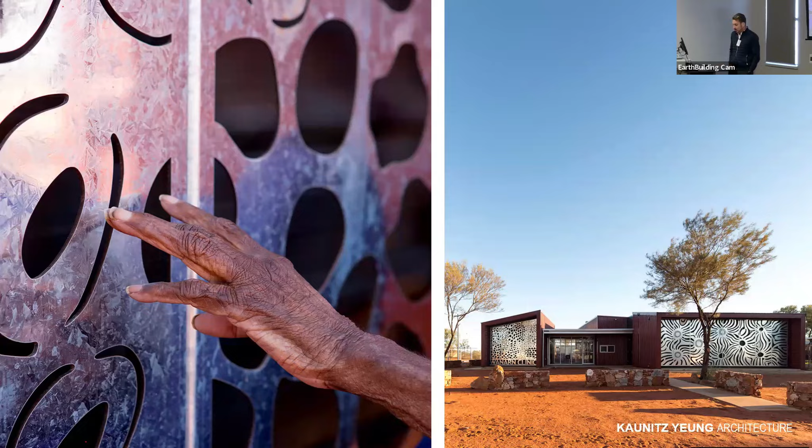When I left the Solomons and moved back to Australia to formally set up the practice with my wife, Go Yeung, the first major project was here in the desert in Wanarn, in the Ngaanyatjarra lands, almost 1,000 kilometres west of Alice Springs. At that time, we had a deep desire to use local materials, and we wanted to make our own blocks for this project. And we really came up against the full difficulty of supply chains and costs and the logistics of doing that.

We did succeed in doing these beautiful stone walls with the stonemason who worked with local youth to collect the stones and make the stone walls. But it took time for us to be able to get to the stage where we could move to the next level with local materials.

And then, you know, you fast forward a decade from Wanarn, which is that project I just showed you, to this, where we finally got to the point where we were able to convince clients to use rammed earth and use local materials. And in a way, the whole philosophy of designing with country and the budgets for these projects, and the sophistication of these projects got to a level to allow that to happen, really.

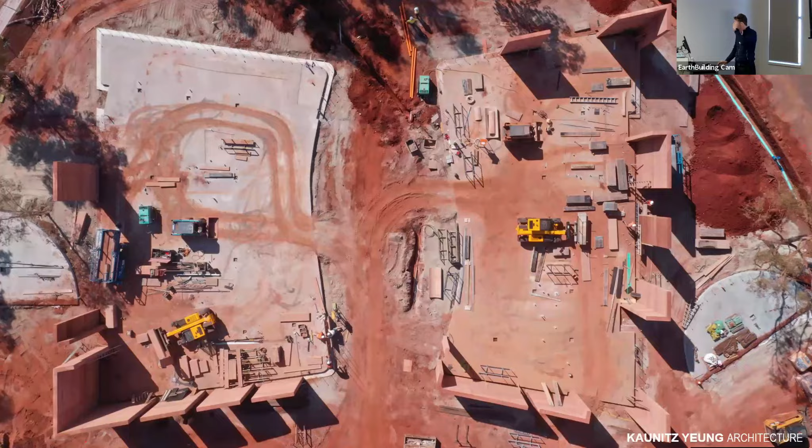And I think what we learned from the stone walls all the way back in Wanarn, which was those simple stone walls really made the community feel like country was part of their project, was part of the building, and therefore the building was connected to country. We saw that at a whole other level on this project, and that's subsequently what we've seen on other projects. I'll just skip through these. There's the site works. This courtyard, these trees have now grown, and the opening here is now almost full of tree canopy.

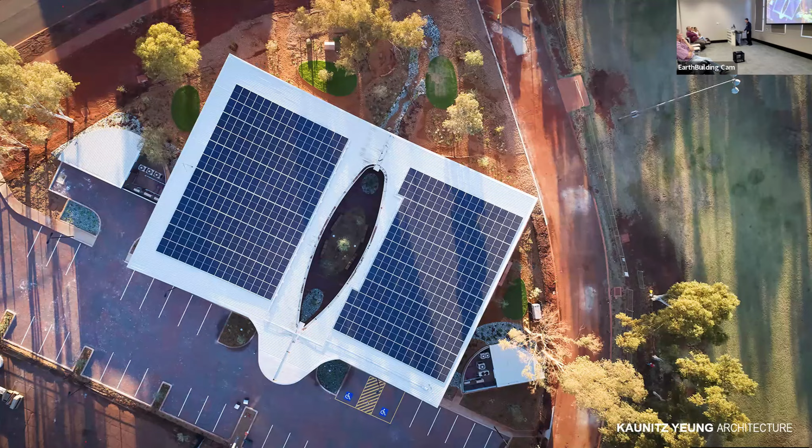A lot of solar on this building. The sustainability on this building is a good step forward. There are practicalities with delivering these buildings and restrictions, but the building, essentially, if they turn the air conditioning off at night, would run 90% on the rooftop solar. So it's a very sunny place. It only rains twice a year, so there are some advantages. And then there's a whole other talk here on the great connection with local artists and community members, and the whole process of connecting the community through art here.

So I'm just going to play you a short video. This is part of the post-occupancy evaluation of the project. We organised this video to be made. We didn't go there. We left this in the hands of the community to tell the story of what the building meant to them. And I think it's important to understand, you're all much greater experts in rammed earth, I'm sure, than me. But what we're interested in with local materials, with the rammed earth, is the real connection, the humanity of the material, and the way it can elevate buildings and make them really culturally appropriate in this case, and loved and cherished, and then hopefully looked after.

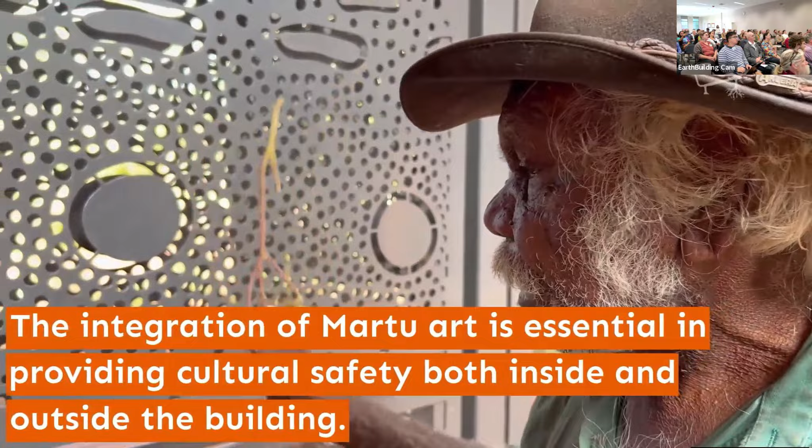All right, on that positive note, I might end the video. There is more to that, which we'll show you another time. But just to move on to another project, this is the Baaka Cultural Centre. The photos are a bit sketchy still here because it just finished last week and it hasn't properly opened or been photographed until May.

This is in Wilcannia, 1,000 kilometres west of here. It's a cultural centre for the Barkindji people on the Baaka River, on the Darling River in Wilcannia. It rehabilitates a heritage building destroyed by fire that's much loved by the community and uses rammed earth to connect with the existing beautiful stone buildings of Wilcannia, grade 1 listed in some cases.

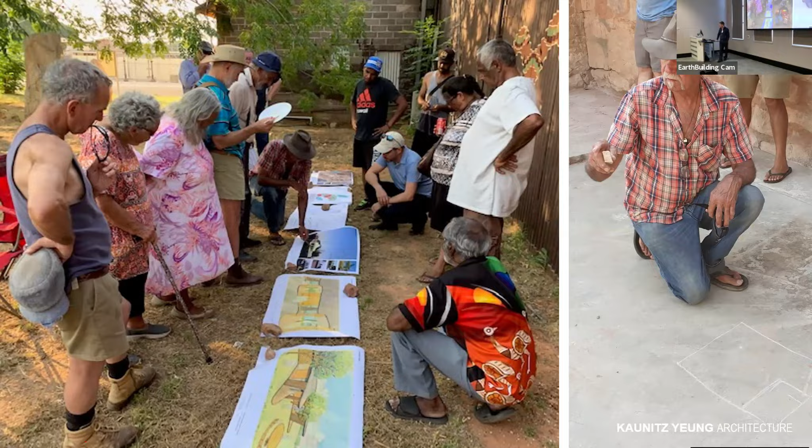Alex obviously did the rammed earth and did a superb job here, making these moulds and fulfilling the architect's every whim, no matter how hard it was. And so I'll just take you through this again. This actually was next level consultation in many ways, and I think the design of the building really shows that the design was really handed over to the community.

I don't think it's really something we would normally design, and that's Uncle Badger Bates there on the left, sketching out from the first meeting exactly what he thought for the site. But many years actually of engagement with the community.

And really at the core of the building, it was about using rammed earth to connect with the local vernacular, local stone buildings, to continue the beautiful character of Wilcannia, but to do that in a contemporary way and in a way that was fitting of a cultural centre, which is quite important to local people. This is the context of Wilcannia.

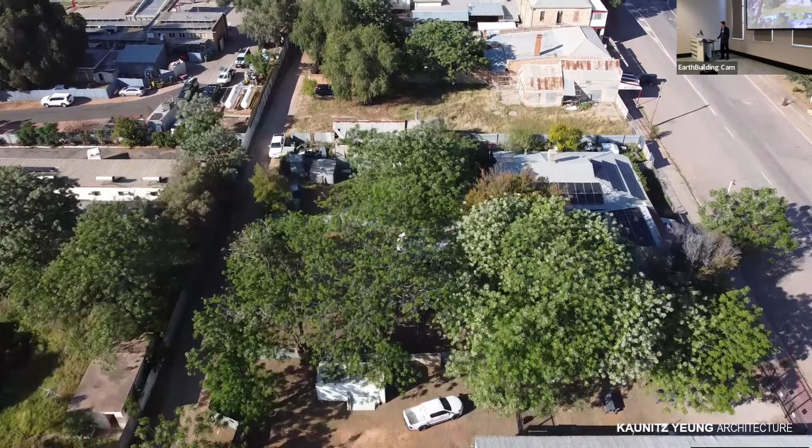The building is arranged in quite an interesting organic form. You have the old heritage building down in the black lines on the two street frontages, and then this undulating form at the back of the building, which was designed to create spaces that replicate the spatial feeling of being on the river.

Each bend in the river was inhabited by a different family, had a different place name, all the way through, the one into the other, and so we're looking to recreate that spatial quality and to create a diversity of spaces for different age groups and different uses.

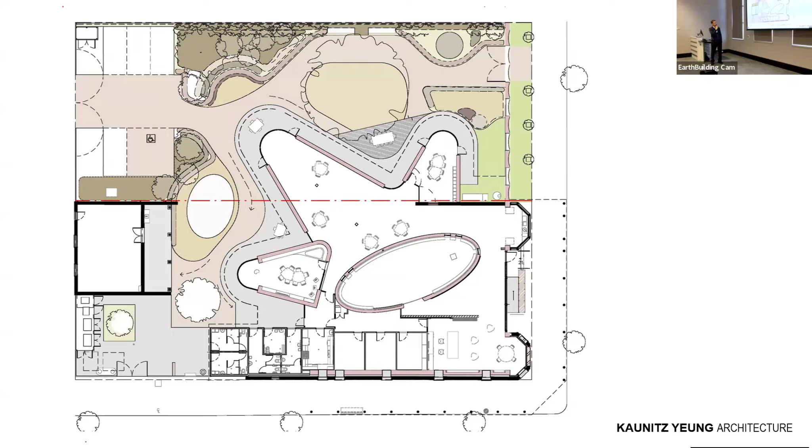And then at the centre, there's this elliptical keeping space, which originally was meant to be two-storey and go down into the ground to naturally cool the building, but because of the COVID inflation, it got cut, but the ellipse is still there, and there it is, right on cue. So this will be the sacred keeping place of the cultural centre and will allow artefacts to be returned from mainstream museums in the capital cities.

There's Marnie with her very proud moment of the most maths she's ever done in her life, designing this doorway. Her parabolic... I had to first teach her what a parabola was, but she... What sort of floor is that? That's a concrete slab floor, yeah.

So this, Aysh will talk a bit more about this, but this is single skin rammed earth. So we're grateful for her to get this across the line because it really made all the difference with this project to really maximise the value of the rammed earth. And it was a very tight budget. It's a $5.5 million project, including all the remediation to the heritage building. So, for what is a relatively complex building, having a single skin of rammed earth actually really helped maximise the architecture and connection to country and was cost effective because we were using it on both sides effectively.

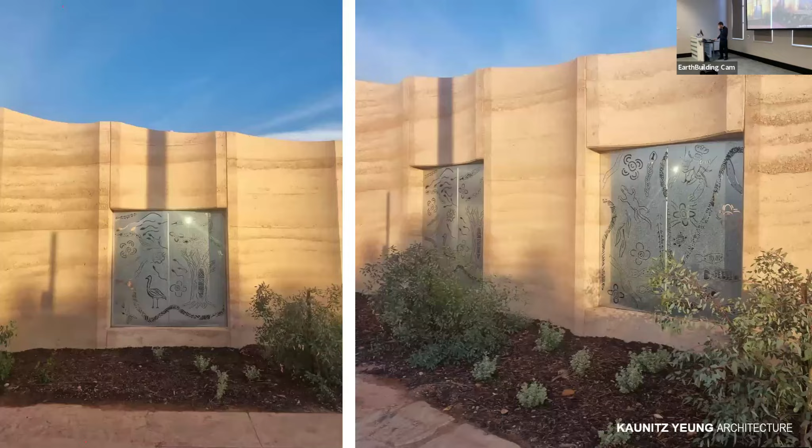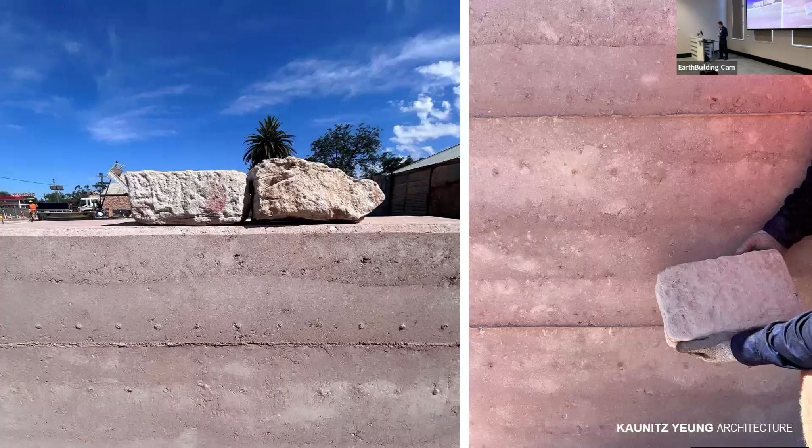A lot of work was done by Alex to do some testing of the colours and to really try to match the existing stone building. So there's the existing stone of the old building in different lights, and just making sure the mix was right for that. And here are the different sample mixes. So it was a conscious decision of doing that. In fact, I believe the mix came from the same location where the mortar for the old colonial buildings was taken from. So it was a really good colour match there with the mortar of the old building.

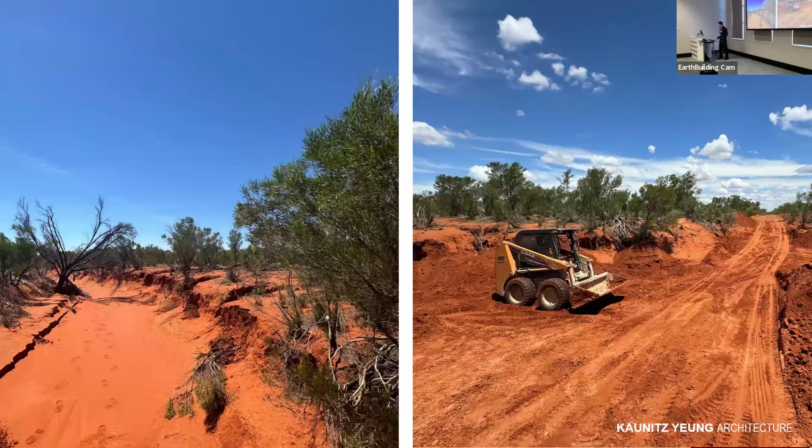All right, how am I doing for time? Good? 10 minutes? Yeah. Okay, good.

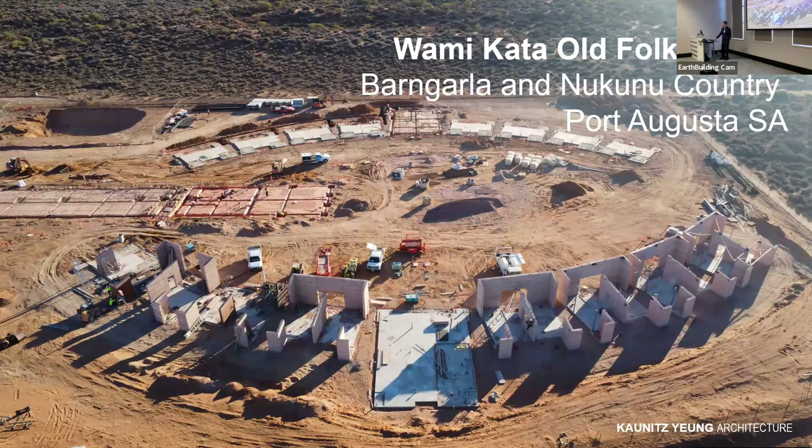So I'm just going to skip through some current projects. This is a project in Wami Kata in Port Augusta. It is a 32 plus palliative care, so 34 bed First Nations residential aged care facility, including high care, built in the valley of two sand dunes. It's quite a large rammed earth building, almost 2,400 elevational square meters of rammed earth. All the rammed earth is structural, and you'll see that in the coming slides. And Alex and Richard are out there as we speak, building.

There's a sense of the scale of this project. I think when everyone arrived on site, everyone took a breath at the scale of what had to be done. And given the location, not too remote near Port Augusta, the site definitely has its challenges, although no trees to worry about.

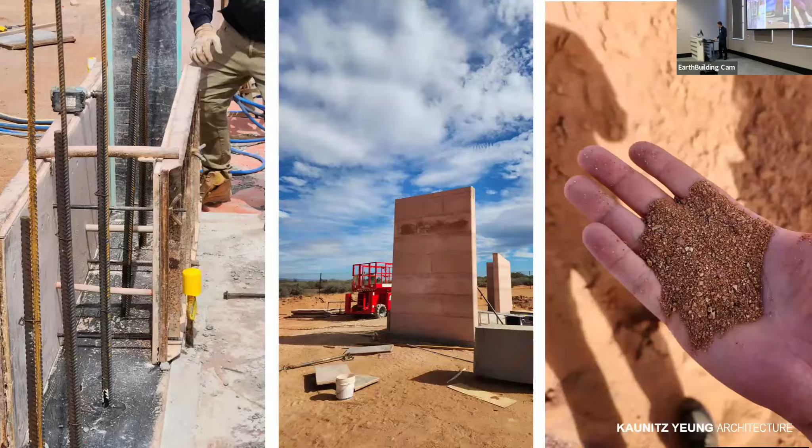And then here's some of the work that's been going on. You'll no doubt understand this much better than me, but everything's slab on ground. The starter bars coming out of the slabs, and then the rammed earth being built with reo inside, and the steel work connecting to the top of the rammed earth. Some of the material. Richard assures me this is the best quality dirt he's seen. Lots of shards, he said. So I take his word for it.

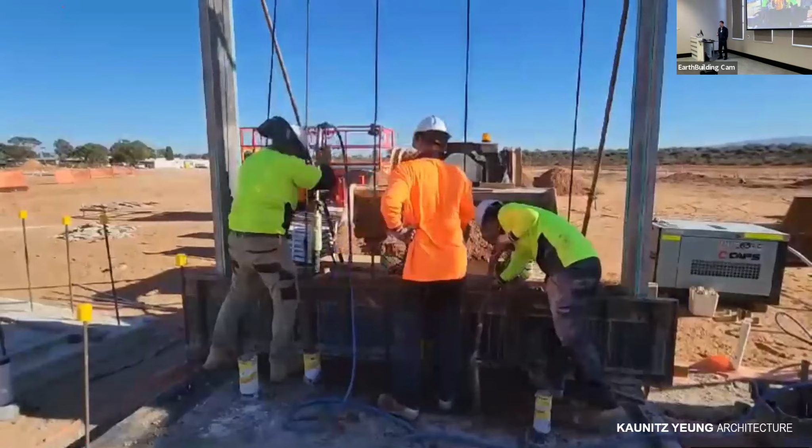So I heard some of you did some rammed earth yesterday, but we always have young architects who have not experienced these kind of things. So we have 2 great young architects working on this project, and they spent a week out on site, working out of the site shed, and got their chance. Here's Anastasia's chance. Last time I showed this video, I got in trouble for health and safety reasons. So please don't share too widely. This is Anastasia with her chance.

So it's important to give everyone in our office an appreciation of what it is to build. It's not an easy job, especially when we design such huge buildings out of it and expect such good quality. So it's good for them to know that.

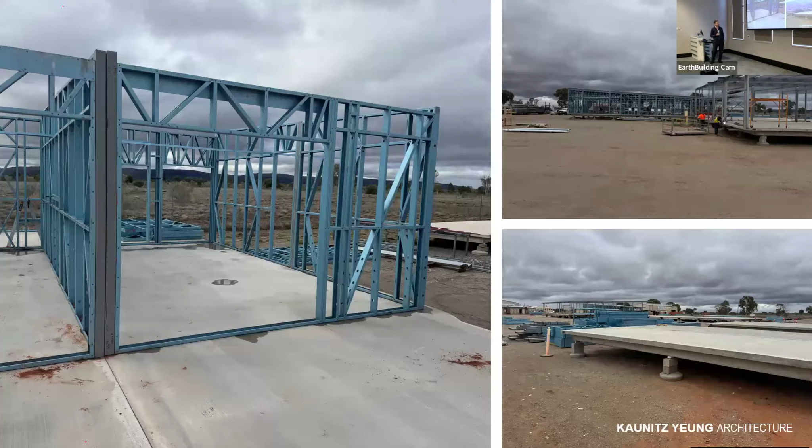Here we're also designing a version of Wami Kata, but this is seriously remote—about 750 kilometres west of Alice Springs, unlike Wami Kata. It's very remote, and construction has just started. I was actually there this week.

It started construction in the yard in Alice Springs. It's going to be 58 prefabricated modules—54 of the 58 on post-tension slabs, a system we've used a lot in our desert projects, with all steel frames.

In parallel, they've started the foundations to build the rammed earth on site. These modules will plug in and be wrapped to various degrees in rammed earth, creating a high degree of integration, trying to make this building not look like a mining camp—even though it's prefabricated—so it feels connected to country and humane, since residents will call this home.

Here you can see on the edge there's a bit of a flange that we built out. The rammed earth is going to be rammed on this slab once it gets to site, at the entry to every resident room. The rammed earth will wrap around, curve in, and form an entry feature.

So every time the resident goes into their room, they're walking towards rammed earth, and they sleep out on the veranda quite a lot, sleeping against the rammed earth. I don't know if anyone else has done rammed earth on prefabricated slabs, but if you have, I'd appreciate hearing how it went before we did it—but anyway, it's going to happen.

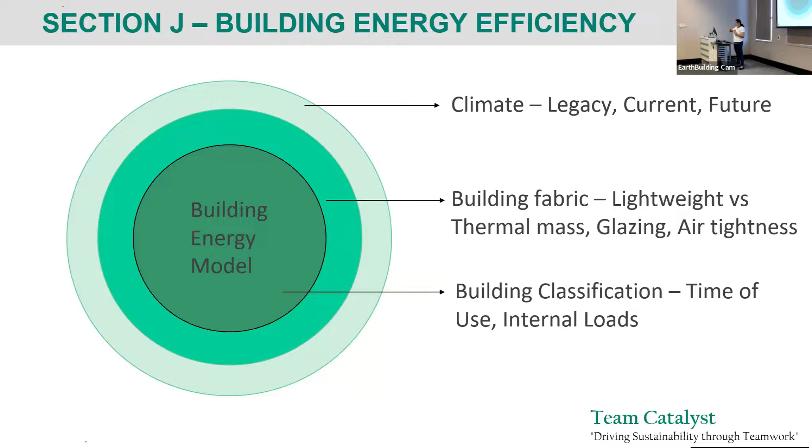But the code only has 8 climate zones. They apply this to the whole of the country, and that is quite blunt, to be very honest - it is quite blunt. So they do recognize that it is blunt, and that is why they allow us to use these verification methods to prove compliance with the requirements.

Okay, next, what is it in the code? We are talking about rammed earth walls, so the section that's relevant to us is J1, building fabric, walls and glazing. From 2019, the calculation methodology was changed - earlier we were assessing walls separately and then glazing separately, we had a separate glazing calculator.

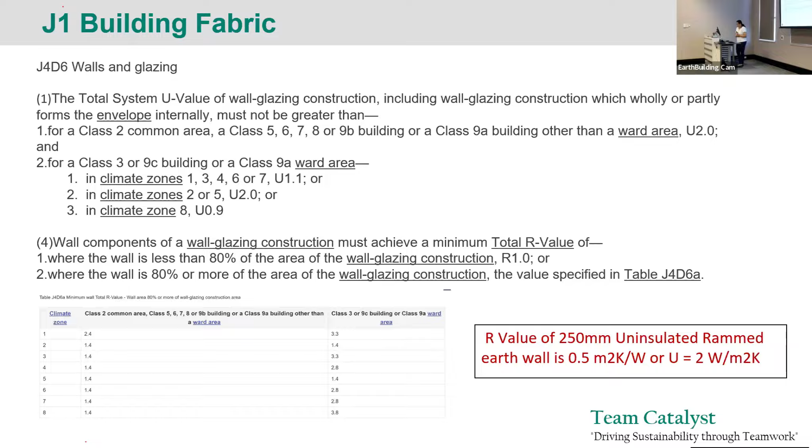And that is because aged care buildings and class 3 buildings are 24-hour operation. You're using the building during the night and during the day. So the equations completely change when you're using it during that time, there's no solar load coming in, and the building switches from heating to cooling mode during that time. So that is why you have all these increased redundancies.

So what do we do? What does the verification method do? We use building energy modeling, we use simulation, and we build a reference building model, and we build a series of proposed building models. A reference building model is nothing but, we take the architect's design, we remove all the nice shading features, because the elemental provisions in the code are derived from an unshaded building.

There are so many variations, so many designs. We can't actually calibrate the code for all these designs. So we have a series of archetypes, and all these archetypes are unshaded, okay? So to sort of mimic that, to comply with that, we remove all the extra shading from the building, and we build the reference building model exactly the way it will comply with the code using your deemed to satisfy provisions. So that is a code compliant building.

Now, when you apply all the other specifications, meaning how long should the building work, what is the internal use, the schedules, for what time is it occupied, what are your thermostat conditions, how much lighting you can have in the building, what are the internal loads, what is the people density, and all these things. You put all these things in the model, and you simulate the model for the whole year, for all the 8,760 hours in a year. You get an energy budget.

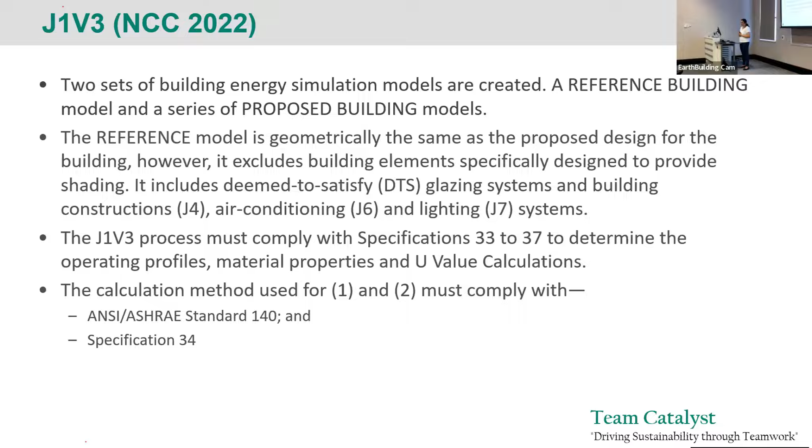Okay, and going down into the J1V3 process itself, what simulation software? So what is this simulation and how do we use it? And can any tool be used to comply? No, you have to use a tool that is ASHRAE ANSI compliant, and it has to undergo a series of testing. And what we use is EnergyPlus. It's actually developed by the US Department of Energy.

Mr. Trump doesn't know it, and we hope nobody makes him aware of it, because it's a great contribution to the world. The US government has spent, I think at this point, about 600 to 800 millions of dollars. It is free to use for everybody in the world. Every single energy simulation software which has got a front end, a graphic user interface, is actually running on the US DOE EnergyPlus. It's a brilliant piece of software. It's had some 20-25 years of R&D going into it. And that's one of America's greatest contributions to humanity. We just hope nobody tells it to Mr. Trump. So, okay.

And we use a front end, but EnergyPlus is all computer language. Okay, I can't do any coding. So we really can't access it that easily. We need a graphic user interface that helps us convert the geometry data that we put in into the simulation language, and it gives us various results.

So we use what's called DesignBuilder, and you can see that we have one single model there, and we are able to get all these outputs from that one single model. We are able to do so many analyses, and that is what helps us consult with our clients to help them navigate this very, very complex compliance process, particularly for complex buildings and high-performing buildings.

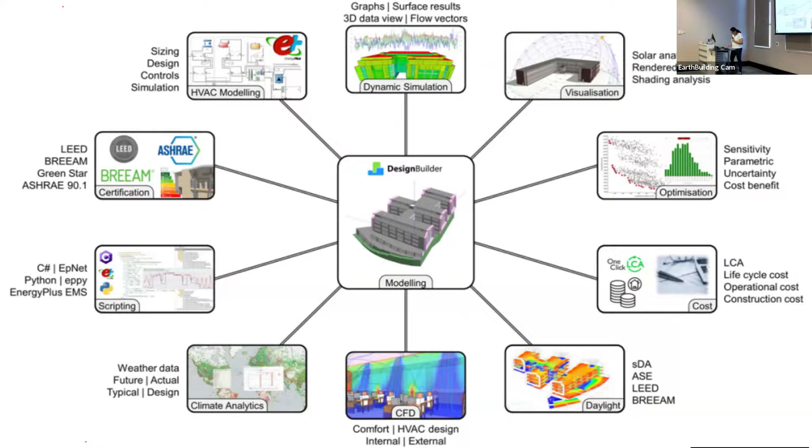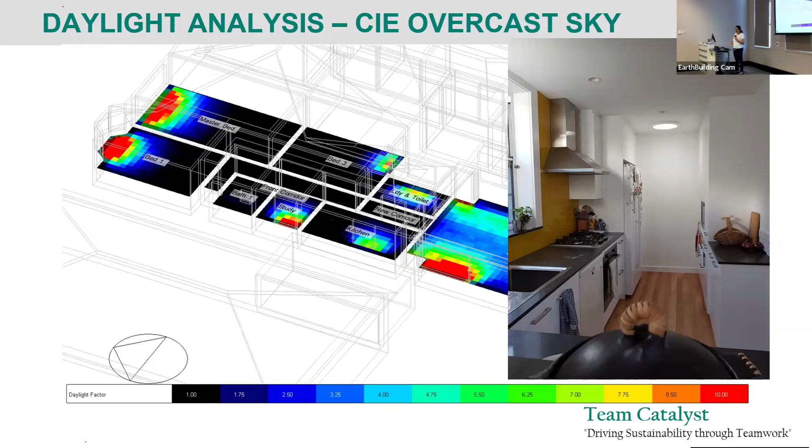So this is the kitchen area, and you can see there's a big black. One half of the kitchen is getting light, the other half of the kitchen, there is not much light. So we introduced a solar tube there. This is a very, very old semi, about, I think, 80, 90 years old. So the owners were a bit hesitant to break the roof, but then we managed to introduce the solar tube. And now you can see that the spread is much, much better in the kitchen.

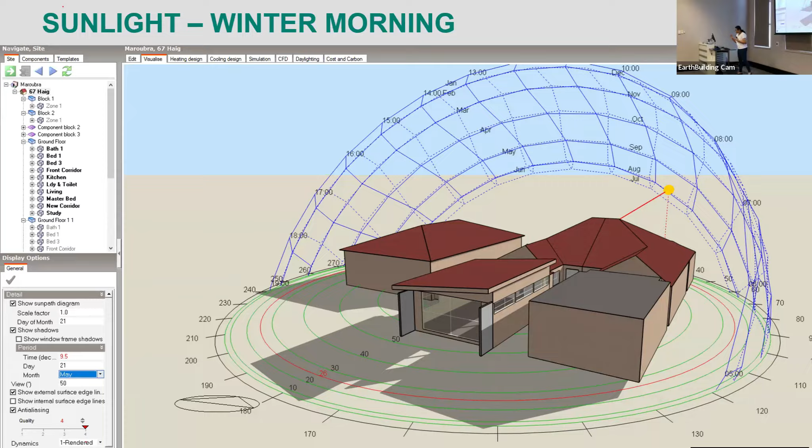Again, the model is precise to the extent that we are able to model what happens to solar geometry. You can see that's the building, and that's a winter morning sunlight. So this is the eastern facade, and you can see the sun patch in the space, winter morning. So this is what we modeled 2 years before we built. And 2 years after, that's the house which is finished, and you can see the same sun patch in the space.

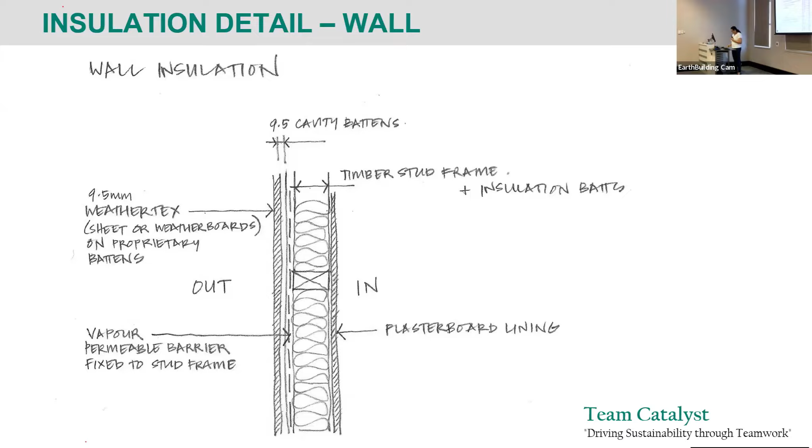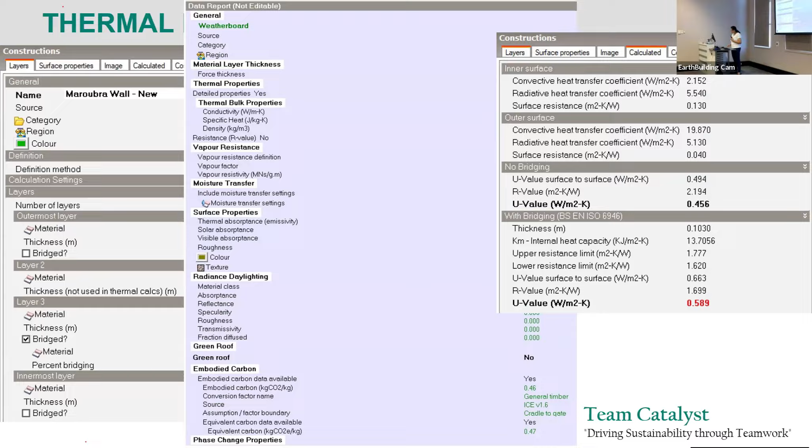And we are able to model all sorts of construction data. This is just a regular lightweight wall, and DesignBuilder is able to take in all this information. You're able to describe the wall in different layers. And it gives you a full report of all the thermal properties of the walls. And it tells you what is the U value, R value that you have to calculate. So again, lots of physics work.

But what is very interesting is the outputs that we can get from these simulation processes. So it's just not about the annual energy at this point. The code wants you to comply with the annual energy requirement. But that's just an output that we have to give for compliance. But before that, we go through a series of steps, and compliance is never about one reference building model and just one final proposed building model and it'll do the job. No. I think for each of these projects, we would have gone through at least about 10, 15 iterations.

And so the most important thing with compliance, particularly for very complex buildings, is to start working very early on in the piece to understand what is non-negotiable for the architect and what is non-negotiable for compliance. And then bring those two to the table, and everything else can be negotiated in between, because it's energy, it's a zero sum, it's a pie, right? So the size of the pie doesn't change. How you make the pie is what changes. Where can you take away some and where do you add a little bit is where the secret is.

So we do a series of analyses to understand, okay, where is this building struggling? Which rooms are the problem rooms? So you have this big precinct. You'll have probably 2 or 3 blocks which are the main culprits, which are sort of bringing the whole thing down. The rest will be fine. So you need to go down to that level, each block, each room, to see, okay, what is happening in these rooms? Our energy might comply, but the people may not be comfortable. So why are they not comfortable? You are able to see what is making that room not comfortable.

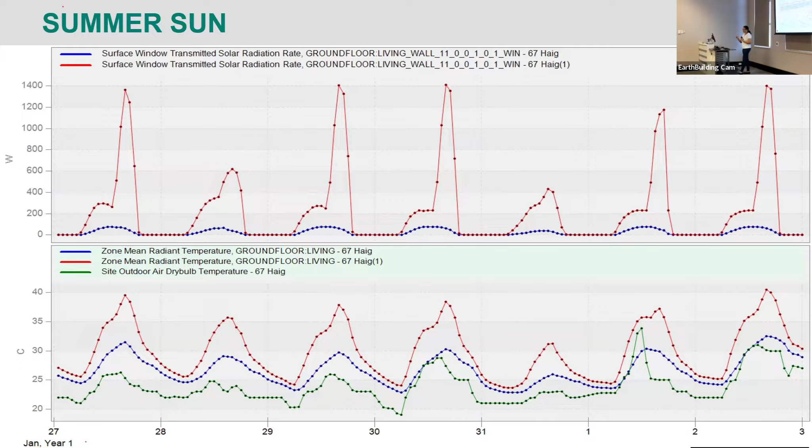So you're seeing big spikes in radiant temperature. It's about 40 degrees, midday. And then we model external blinds on the outside. Without the blinds, again, the top graph, you'll see this graph here. You're seeing these big spikes on the western window, it's radiated. The moment you put the blinds, the curves are softer.

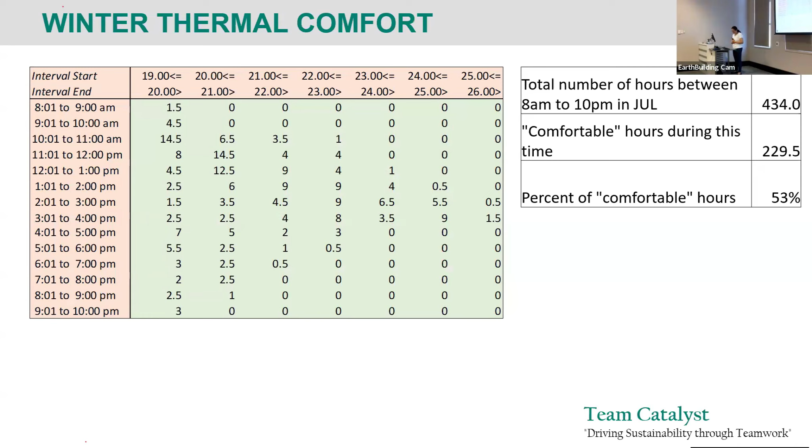So we just wanted to show students what happens. How do you actually understand simulation and reality? It's not just theory, it actually works. And then we get all the other outputs from it. We are able to calculate comfort, how many hours are comfortable during the day, comfortable during the night, and for the period, and all those things.

Okay. Thermal mass. The most important part of thermal mass, with physics: it's a beautiful material, but it has to be protected. It's very important to protect your thermal mass. It looks very nice on the outside, but to make it work, to make it useful, you need to protect and shade your thermal mass. It should be operated like a battery. It's a great storage system. Mass charges every day, and then it discharges every day. So when it is hot, it takes in the heat, it stores heat, and then it discharges the heat.

So you need to find the right balance. You have to combine a lot of other aspects, but sometimes we hit the jackpot in certain climates. So Wilcannia was one such climate, very dry. You had a good diurnal range. The mass, it was just made for it. You just place the mass.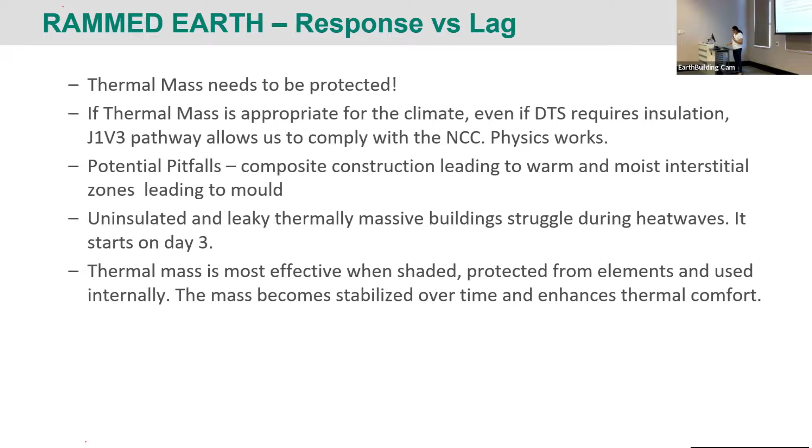So we did some simulation, we actually modeled and then we tested in a house. So an average Australian home at this point leaks to about 15 times an hour. So this is a very favorite example of mine. If we all live in a nice homogeneous balloon, and this balloon is very thin, we need to insulate the balloon because it's hot or cold outside. We want to save energy. We insulate the balloon. And then we need some windows and doors. We start making holes in the balloon.

And then we start air conditioning the balloon because we want to be comfortable. So you put insulation, but you also poked holes. And now you're air conditioning the balloon. So the holes are leaking air. You need to keep blowing the balloon to keep its shape. So at this point, an average Aussie house, you have to blow it 15 times an hour to keep its shape. Okay, so your air conditioning systems are designed for just once.

So either the air conditioning designer oversizes it massively because he knows you're going to leak 15 times. So he puts a system which is 5 or 6 times more than what you need so that you don't complain. It's nice and cool all the time. You're just air conditioning the world. Or if he right sizes it, you're going to be forever complaining. It's like, oh, this system is not working. I'm always hot or I'm always cold, because your balloon is constantly leaking.

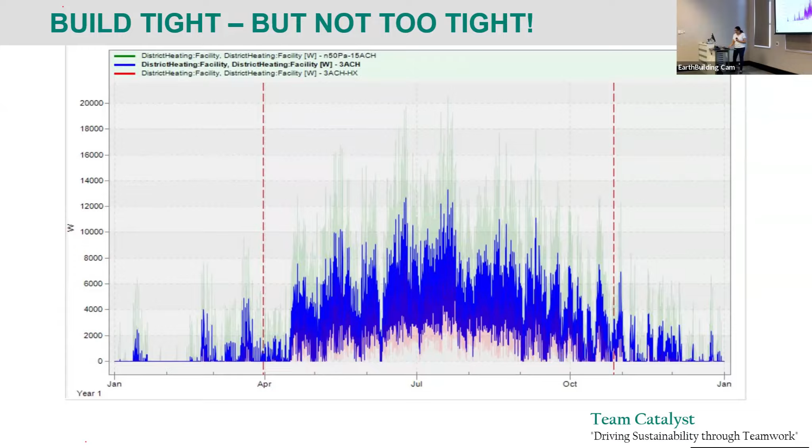And then we did the run where we introduced the magic heat exchanger, your mechanical ventilation with heat recovery. And it's come down to about 9 kilowatts. We did not increase or decrease the insulation in the walls. We did not change the glazing. We did not do anything else. This is just air tightness.

It comes down to how well you construct your buildings, how well you tape your membranes, how well you protect it from weather, and how well you detailed it to make sure there are no leaks in the joints. And you're able to bring your air conditioning system from 20 kilowatts all the way to 9 kilowatts. The biggest piece of machinery you can put in a building is the air conditioning, and it is huge. And going forward in this changing climate, no 2 years are the same.

From 2007 onwards, year on year, we've seen a change in the climate. Every single year, the weather has changed. We've seen a change in your climate file. So the buildings don't perform. We can't take it for granted that, okay, you do this, it'll be all right.

No, it doesn't happen. We are moving, the RCP 8.5 scenario looks more than likely now, and the 2050 weather is the stuff of nightmares. So we won't go there. But what it's saying is that pretty much for most of Australia, we won't have a heating season at all. And that is quite scary because I've got bananas blooming in winter in Sydney at this point, and it is pointing to that trend.

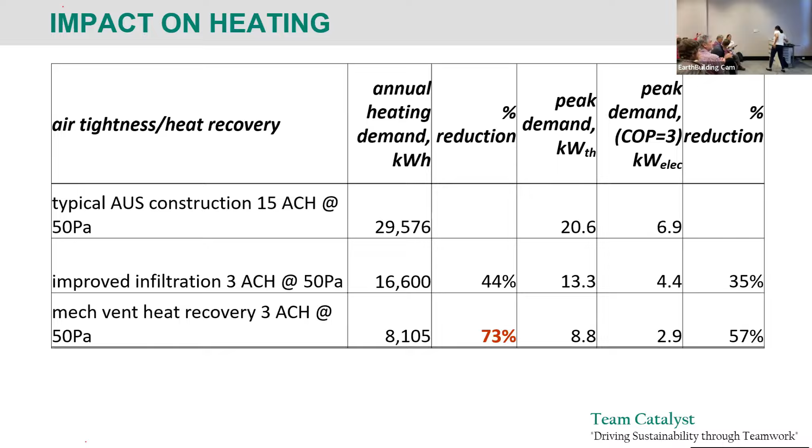Oliver Biggs on next. Oliver is a civil and environmental engineer. He works for BSC Consulting, and BSC Consulting does structural engineering and performance solutions for natural materials. So over to you. Beautiful, thank you.

So a little bit of background about me. I studied environmental engineering, which is an interesting degree, but the work kind of funnels you towards mining or contaminated land. I worked in contaminated land for a bit and didn't really like it. So I went back to doing some carpentry with a friend of mine and got right into building and construction. Then I started working with BSC Consulting about 2 to 3 years ago.

So we do residential structural design, we work on lots of natural building projects, and we do performance solutions as well. We've heard a bit about performance solutions already, and that's what I'm going to talk about today.

Hopefully the presentation isn't too technical and dry, but from speaking to people around the conference, it is a topic that people really want to know more about. Who feels like they understand performance solutions and what they are and what's involved? I'll raise a hand. Yeah, so some of you do.

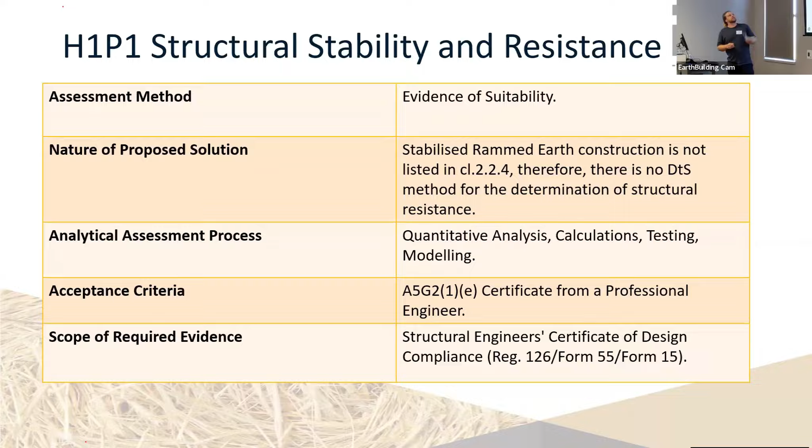So for this method, you need to get a structural engineer to design your project. They'll do their own calculations and modelling and rely on certain tests that have been done. The way that we show compliance in our reports is we just refer to your structural engineer's certificate of design compliance - that's like a Reg 126 in Victoria or Form 55 in Tassie, it changes depending on the state. Essentially we're just saying the engineer certified it, here's his certificate.

So weatherproofing - this is just about preventing the ingress of water through your wall system. There's 2 components to this. The first one, we do comparison to the DTS provisions for masonry, and the first part is to have flashing details. We often request architects to provide us section details of how they plan to flash the openings in the Rammed Earth wall, and we compare that flashing method to the deemed-to-satisfy provisions for flashing to masonry.

The other part is we require the architectural details to specify a siloxane-based weatherproofing system to be applied to the external exposed surfaces of the rammed earth. The reason we specify siloxane-based weatherproofing is because there are studies that show it still allows for breathability in the walls while providing an appropriate level of water resistance - things like Plasticure and Tech Dry Earth Aid for rammed earth. So the assessment method we use there is the comparison to the DTS, and the evidence we provide refers to different studies done on siloxane-based weatherproofing and the architectural detailing.

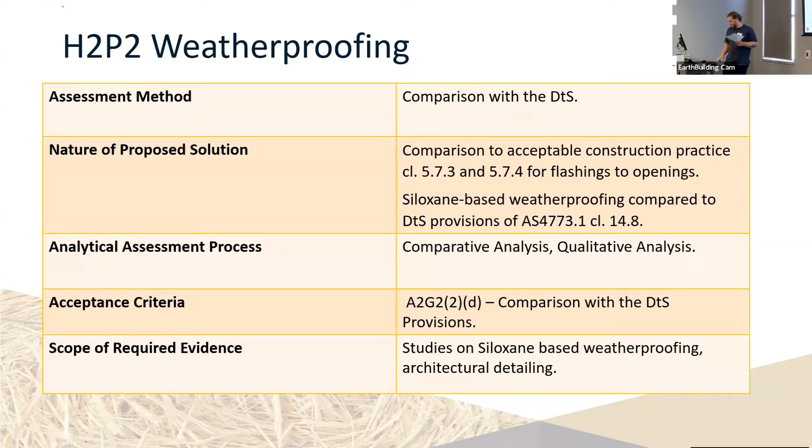Rising damp, once again, we compare to the DTS provisions for masonry. Essentially all we require to meet the requirements for rising damp is to have a damp-proof course installed at the base of your rammed earth walls, and if it's constructed on a slab, a vapour membrane installed under the slab, which is standard practice anyway. All we need to refer to is that these details are in the architectural detailing and they comply with, well, are comparable to, the performance for a single skin masonry wall.

Spread of fire. Generally in a normal rammed earth house you wouldn't need to address this, unless you were building within 900 mil of your allotment boundary, or within 1.8 metres of another building on the same allotment. Because this was a partition wall for this project, the wall needs to achieve an FRL of 60-60-60, meaning it can withstand 1 hour of fire testing for its structure, integrity and insulation.

For this project, the client provided us with a 400 mil thick rammed earth wall, and they actually provided us with an FRL test done on a 400 mil thick wall. That test lasted 4 hours - it was 240, 240, 240. So that well and truly achieved compliance there. We know rammed earth achieves compliance for fire, it's just about having the testing to be able to show that.

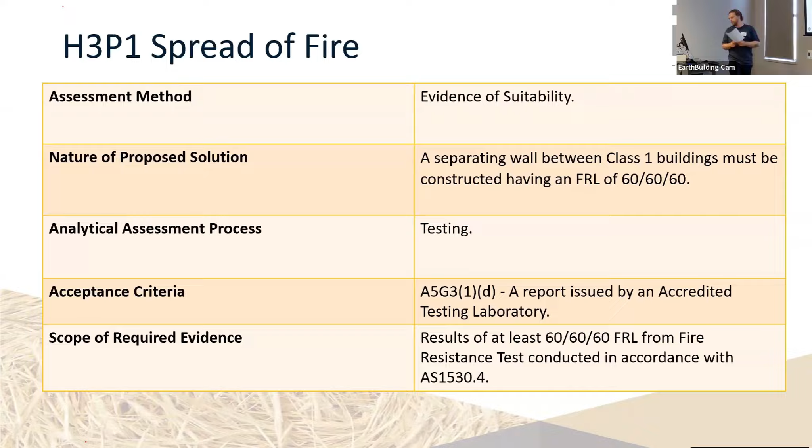Wet areas. Rammed earth isn't listed as a deemed-to-comply substrate for wet areas. So in your shower zones, they need to be waterproof, with separation from the rammed earth walls - whether that's a waterproof membrane and tiles, or some people do a batten cavity to allow breathability, and then you have your aqua check with your villaboard lining.

Outside of the shower zones, it needs to be water resistant. We draw comparison to this clause - again a masonry clause - where if single skin masonry has been treated for water resistance, then that's acceptable. But you still need to do your wall-floor junctions, so we need to show architectural detailing for your wall-floor junctions and your flashings, like coming 150 mil up with a tile skirting or whatever. The way we compare it to this masonry clause is we require the siloxane-based treatment again.

Sound insulation - again, this was only relevant for this project because it was a partition wall, so usually you don't need to worry about this one. We contacted EBAA looking for some tests about sound insulation. I wasn't able to find the appropriate testing done to show compliance with the DTS provisions. So what we did in the end is engage an acoustic consultant. Their consultancy had already done some testing themselves on the acoustic properties of rammed earth, and they were able to write us a letter looking at the architectural drawings and state why it was compliant with this performance requirement. So we relied on an external consultant for this one.

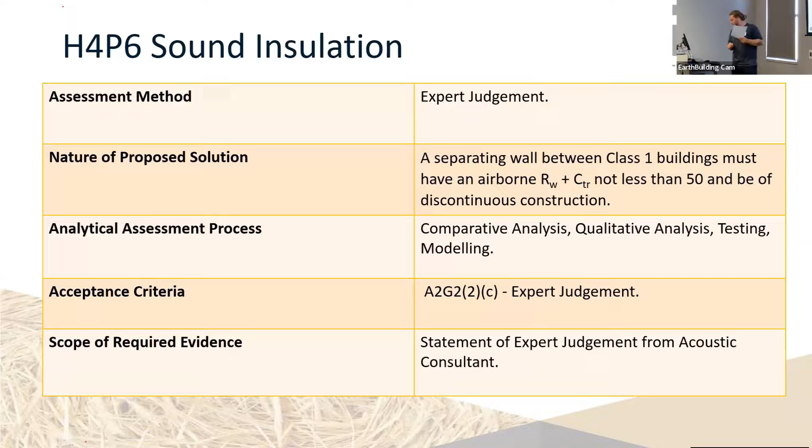Sorry, it's pretty repetitive and technical, but we're almost there.

Condensation and water vapor management. We don't actually often get asked to address this anymore with rammed earth, but when we do, once again we compare to the masonry standards and the clause stating that a single leaf masonry external wall, when constructed with a water resistant coating, is acceptable construction practice that complies with the DTS. So our job is to write a few paragraphs about how the siloxane-based treatment gives you the same levels of performance as the water resistant coatings set out in the masonry standards.

Sometimes with condensation and water vapor management, you can get pushback with this one. And that's where we go to the verification method. So we can use our own verification method, like a simplified thermal model of the wall system, to show that you're not going to get a dew point happening within the wall assembly.

And then building in bushfire prone areas. So this is actually the one performance requirement where there is a deemed to satisfy solution for rammed earth. So if you get a building surveyor saying you're in a BAL 30 zone or whatever, and they want a performance solution for it, you can just refer them to AS 3959, the building in bushfire prone areas standard, because essentially the DTS requirements for this state that if it's constructed in accordance with AS 3959, then

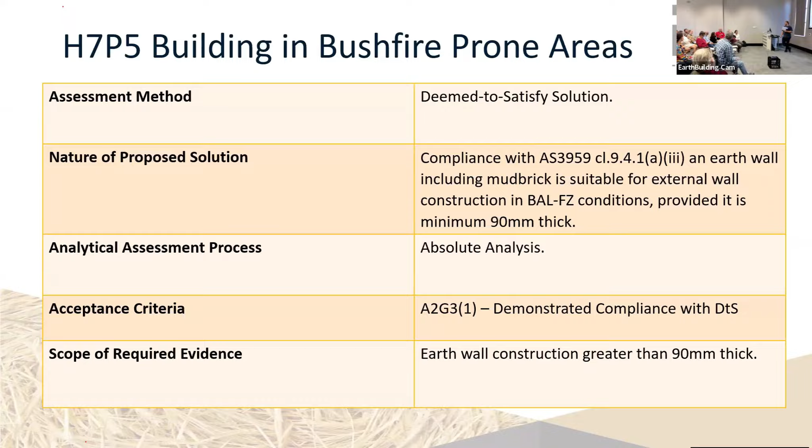The two stories. Yeah, it's a two-story townhouse in Melbourne. And we're seeing more of these projects coming through recently. Personally, I think it's a really great use of rammed earth. So 400 mil is structurally sound, it's obviously more than one story. So structurally, it takes on the loading for the floors and the roof? I believe so. I actually can't remember what was involved because we didn't do the structural design for this. And that's stabilized rammed earth as well. You just need a detail, some sort of ledger plate or mounting plate on the wall to connect your floor joists into.

Can I just ask about cost variables, going through all of those different categories that you just went through? I'm not a designer, but let's say you're talking to clients about going down the performance solution route for a particular building system. How can you tell what the price difference is going to be for the performance solution, in terms of where you are and what's already out there available to draw on? So I guess it's about coming to you first in a consult, if you're talking about light earth or cob or anything that might not be as established as rammed earth.

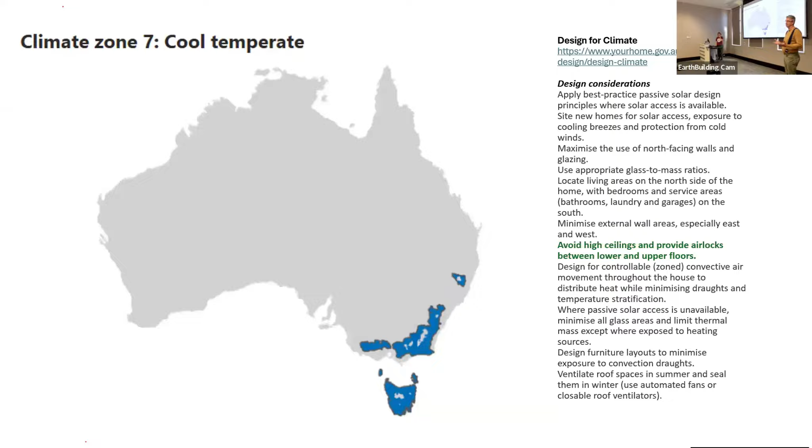There are a few things there that we really had to tussle with, and it was interesting that architects and designers don't always get what they want. You actually have to compromise a lot along the way, and our clients in this case had very specific ideas about the aesthetics of their buildings. So, for example, issues we had to back down on were eaves. We were trying to push for big eaves to protect the building in this climate. And the aesthetic they were interested in was much more about European barns, which is fine, it is a fashion. And we just had to go along those lines.

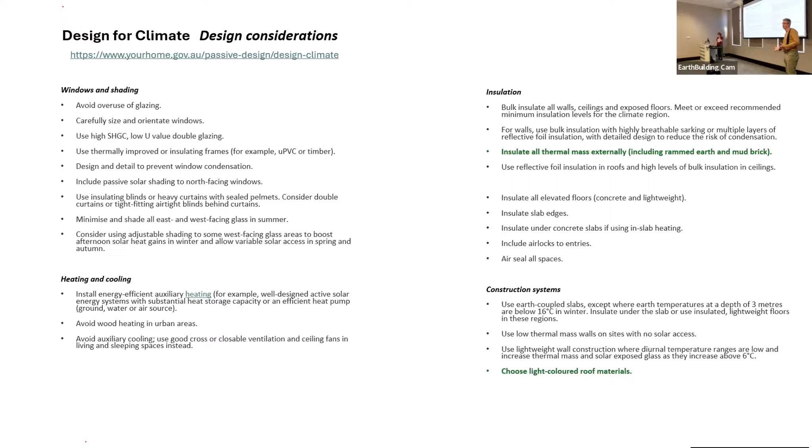Similarly, having a black roof: it's not really appropriate in this climate, but they really wanted a black roof. Not really appropriate when you've got a concrete slab and potential for passive solar design to put a timber floor over it and insulate it, but again, that aesthetic overrode. So that's all fine, and these are issues we have to work through. It's not all about us getting what we want and having the best outcomes in terms of, say, thermal performance. Sometimes you have to back down, and the client makes those decisions fully informed.

Then, as we go through all these maps, it gets finer and finer. When you look into NatHERS climate zones, for Bathurst they have their own specific climate zone, 65, and a whole lot of data about that. We just want to design a building, but we have to pay lip service to this, and we go a bit beyond that, hopefully. In a nutshell, it's a big site, with beautiful views to mountain ranges and farmlands. Everywhere you look, it's just beautiful. And so they really wanted to capitalise on these views as a primary objective.

That, you know, if I wash up, I want to see that, and if I'm cleaning the toilet, I want to see that, and as I walk down the hall, I want to see that. Like everything's just beautiful. So you just got to. Like the whole thing is just about.

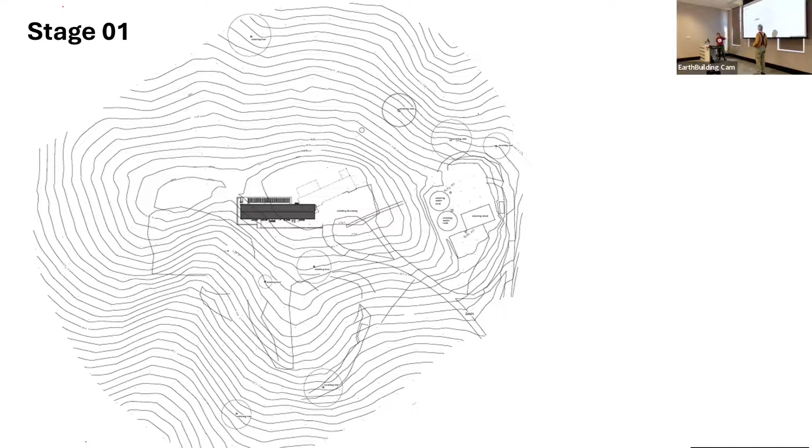And the dotted line is the old slab of the burnt down house. What's that? The dotted line is the burnt down house old slab, which we couldn't reuse. Oh yeah. We really wanted to reuse the old slab, which was the only thing that was salvaged. But A, it was orientated a little bit too west, and B, it wasn't really capturing a few of the key views. We worked really hard with designs to try to make that engaged, but in the end they made the decision to leave it and start again.

And so this is stage one of the building. I'll just give you an overview of it. So it's just a bar building, like a single bar with a spine running right down the length of it, like a one-sided alimentary canal. And we basically are trying to maximise as much of the external wall to these views.

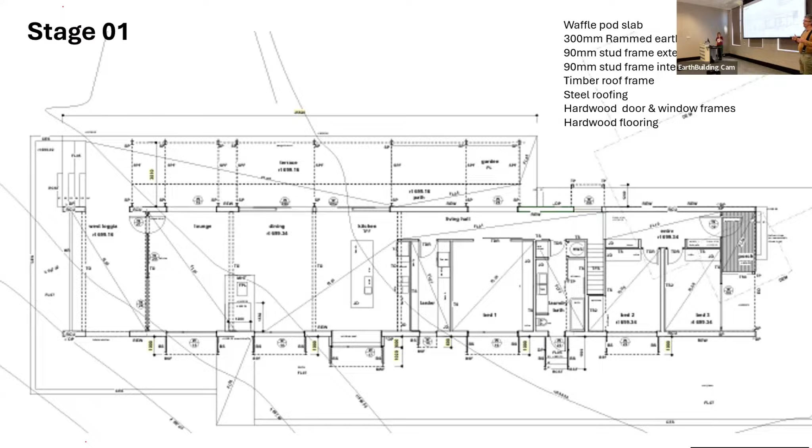And then when we get into this living area, we want to wash up and look down here, and we want to make the fire, and we want to look here, but we also want to look here, and everything's just lovely. So what ends up happening, which we've learned now, is we're creating a lot of surface area, and it's problematic. And then there's a little attic upstairs as well.

So this is what we're actually trying to say. This is designed before October 23, when the goalposts changed. Before this, basically any house that we designed, as you were saying earlier, we could get it through. We could get compliance with BASIX. We could get compliance through NatHERS. You just had to add a bit more, add a bit more. But now it's different. And this one was one of the last that bolted through the gate.

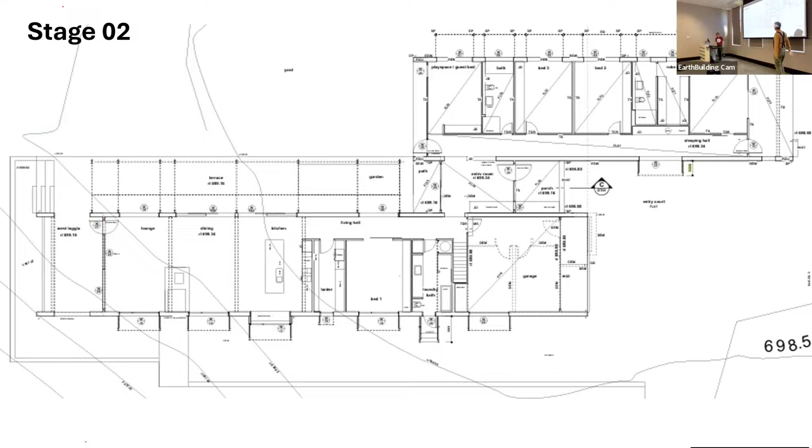Oh, sorry, we should just go up and explain the construction. Can we just go back? So this is where the rammed earth is, here and here, and we'll just talk about that one because that's the second stage. And then everything else is stud frame, and the slab's waffle pod, just so you get an idea. So it's just these two north facing and south facing walls.

So sorry, go on. Yeah, so he recommended insulated. It didn't pass NatHERS. It couldn't. It nearly did, and the assessor said it needs to be insulated rammed earth. So the prices came in, and then the client said, "I think." So basically, it became a financial decision, right?

So that client knew that they'd have a much more comfortable building with insulated rammed earth, according to the NatHERS assessor. And they then asked the rammed earth contractor to give quotes, and they got $197,000 for the 300 mil uninsulated, $297,000 for the 450 mil insulated. So the owner basically says, "What do I do? I'd prefer to save that $100,000." And so they're very hands-on again.

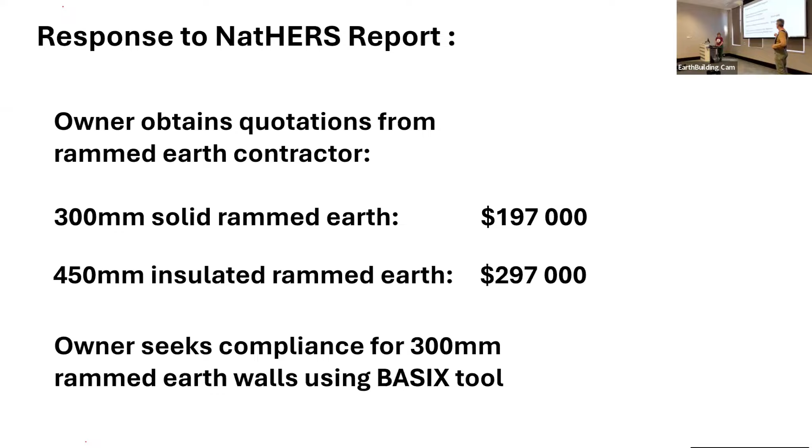He said, "Well, I did the BASIX before. I'll do the BASIX this time. I'll just forget the NatHERS. We'll do the BASIX myself." And they put it through. He did it, and it passed. So it passed with 300 mil solid rammed earth uninsulated at both stages.

So that was at the time, I remember at EBAA, where they were saying the BASIX tool was taking more into account, or at that time seemed to be, it was all very confusing. Anyway, at that time he got that through. So we got a bunch of BASIX. That's kind of a summary of all the BASIX.

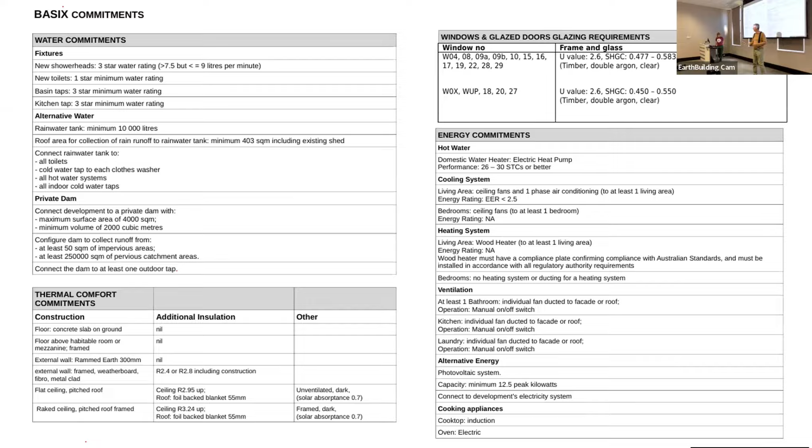We're not going to go through this, but you can see down here it says 300 millimeter external walls, 300 millimeter rammed earth, additional insulation nil, pass. So we're thinking, oh, that's pretty good, we did okay. So let's move through. Now, they built the house and they moved in and lived in it for 2 years. And we've got a little bit of anecdotal feedback on it.

That's not great. But for this seminar, when Rhiannon talked to you guys about whether we can do something about regulations, we thought, well, let's run it through the model using the Hero software under the current 7-star requirement and see how we go. And we did it exactly as it's built. It's got to meet 7 stars and it gets 3.2.

But again, it's hard to know exactly what the original was; it depends on what figures were put in. Also the client put in the BASIX, so it's not the same person putting the same information in, not the same software tool. But it's still quite a big difference. I think there's another slide, this one. So the previous one was 4.8 in BERS Pro. I think it was BERS. And this one's 3.2 in here.

Fundamentally, when we moved from 2019 to 2022, things actually changed, so we had to redo it. You were saying 35, we had to make one correction.

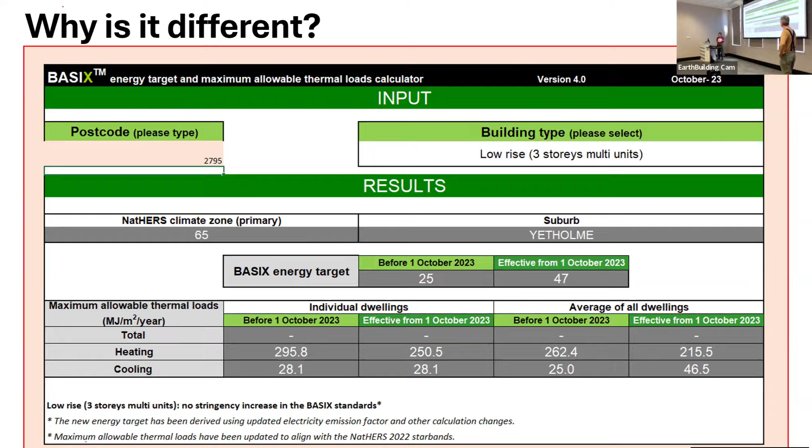What's that, climate 7? Climate zone 7 was it? 65, NatHERS, yeah. NatHERS one, but I think it's climate zone 7. All right, let's go.

So what we did, we just sat there, and if it was a real project we would seriously be freaking out, like oh my God. But because it's built and it's all done, it's just theoretical for now. It was cool - we're sitting here this week and thought, let's run it through. What do we do? If we go through the panic scenario, imagine it'd be slightly different emphasis on what we would do, there'd probably be a few expletives thrown in there, but we don't have to resort to that right now.

So the first thing we do is look at - from what we think, we could look room by room, but we didn't have time. Replace timber floors with ceramic tiles so we can get that thermal mass back on the floor rather than insulating the slab. There wasn't much change from that, just a slight improvement. But the big one was adding the insulated rammed earth back in.

This time we just did it on the two southwest walls, and hey presto, we go up a whole star. The windows were already maxed out as argon-filled double glazed, good quality, right - that was an assumption right from the beginning.

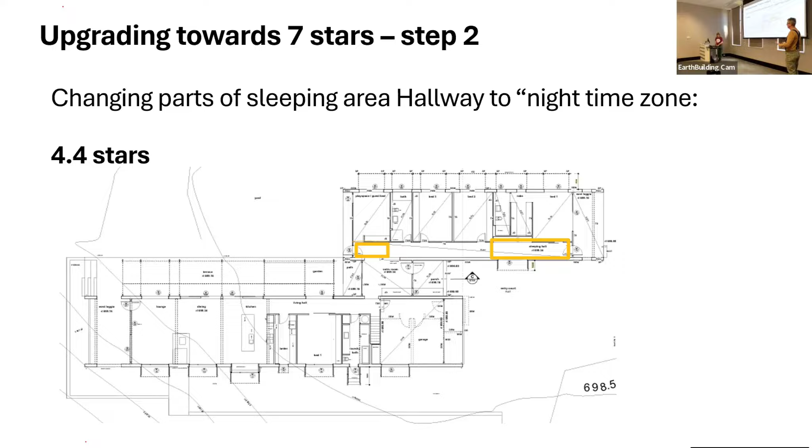So we're still shy of 7 stars. Then we use the zoning - there's these daytime and nighttime zones within the NatHERS parameters, and one of the things we did was play with these zones. Instead of that hallway being a daytime zone, we extended these rooms into it to halve basically the area of the daytime zone. Just working with the software really, and we get 0.2 of a star.

We go up, okay, next step. Okay, we're still not there - oh my God, we're still not there. Step 3, we go, all right, we had a cathedral ceiling in this cross section through the living space, this big cathedral ceiling up here. We thought, oh, in other projects that's really made it a disaster in terms of cold, high ceilings. And in the Your Home recommendations it specifically said no voids or double height ceilings for this climate zone, and we're like, and we're putting in a cathedral ceiling. But all the ceilings are 3 meters so that they're tall. So we go down - funnily enough, we go down 0.1 of a star.

And the reason was that we're increasing the cooling load in summer. So it's this juggling act - you're going from 3 and what, 5? We went from 4.4, so in terms of cooling load it was 3 before, which is nothing. So you might be going up just a tiny bit - they're punishing you for that, otherwise this is the real problem.

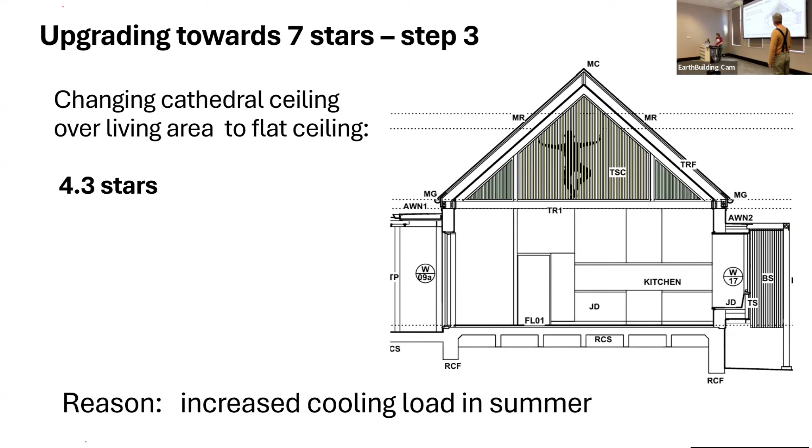So then we keep going, trying our best. We go, okay, well let's insulate the garage door - well, it might do nothing. We try it, and then we added insulation to the northeast walls, and then we go up another star, not costing us anything, improving significantly just by adding that. And then, yeah, we add another $100,000.

And then step 5, we changed the insulation.

Just going to a chunkier insulation, we get 5.7. At that stage, I asked what insulated cavity brick would look like at this point, because since October 23rd we'd had a lot of success with big increases in star rating by putting the thermal mass inside, turning all the interior stud walls to brickwork. It's a massive increase, and it's in her software anyway.

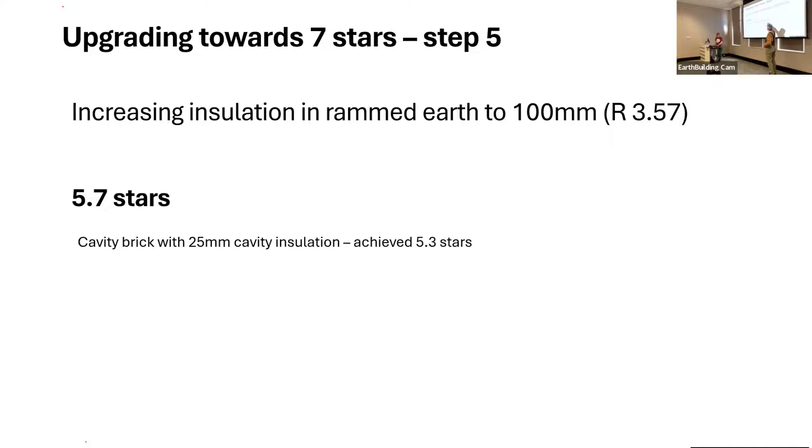Mass, we talked about it before, but we thought it wasn't playing a big part. Putting mass inside definitely improved houses in our Illawarra and Sydney zones, but it did here too. The cavity brick, as you can see, is actually performing worse than the insulated rammed earth, which we thought was interesting.

In terms of the cavity brick and the rammed earth? No, cavity brick was - well, doing 100 mil isn't practical. You can do 100 mil in rammed earth, but you can't really do it in brick. Can you? I mean, yeah, I don't know.

So in this star rating system, in NatHERS for example, you calculated NatHERS - do they take into account anywhere the air change rate, like how airtight the building is? Yeah, I think it's all built in. This is us scrambling - we need to be the engineers who understand it, but it's very complicated, and it is built into the software.

But then what do you assume? Do you say we build like a passive house, so we have lower blower door test air change rates, or some code? You can actually do the passive house system through the BASIX tool, but this doesn't do blower tests. No, you can't put it in, there's nowhere to input a blower test. This is regulatory mode, this is the main one.

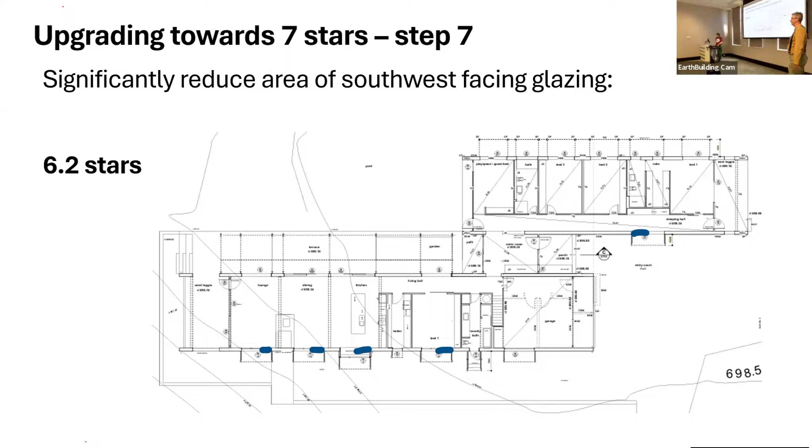No, they're fine. We're fighting NatHERS, you've got to get down to arrow slots. Yeah, that's right, we're fighting NatHERS, we've got to shoot it. So 6.2 stars - we're within cooee now of 7 stars. We're getting there, and then we just gave up. That's so close, yeah, really close.

So then we're thinking, well, what else could we do? We could provide eaves to protect the rammed earth, which would have been a good idea in the first place. Relocate the garage to a separate structure - so now we're redesigning it, it needs a redesign. The bar, reducing the ceiling heights throughout - we could do something like this.

Locate the sleeping areas - okay, so we realised that what was really problematic was basically all of this surface area. If we actually blocked probably 70% of the views, it would probably be a no-brainer. In fact, if we go to the next slide, this is a job we're just doing at the moment in Wollongong.

It's not in the same climate zone, I know, but we ran a model of this, and in a nutshell it's basically living spaces to the north and sleeping and utility spaces to the south. There's a couple of rooms that aren't so great for sunlight, but they're sleeping spaces, so it's less of an issue. We run that through Hero now, well before we go to DA - at the sketch stage, once we've got a layout, we tell our clients we have to do a thermal model now.

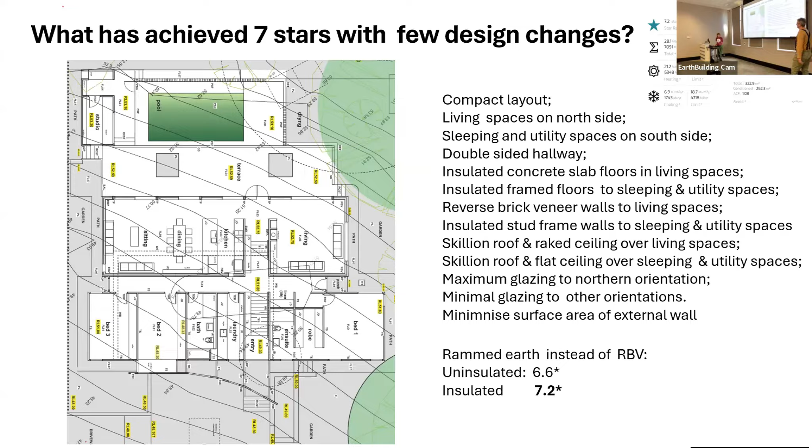We ran it with uninsulated rammed earth as a model, and we got 6.6 stars, and then we insulated the rammed earth and we're cruising at 7.2 stars. So yeah, that's basically what we got to.

What's the next slide? So we just thought we'd quickly, while we've got the chance - it's kind of an interesting build because it's really simple, the whole thing, there's no complexity to it. You can see the countryside, why they wanted to just open it up to these views, because it's really spectacular.

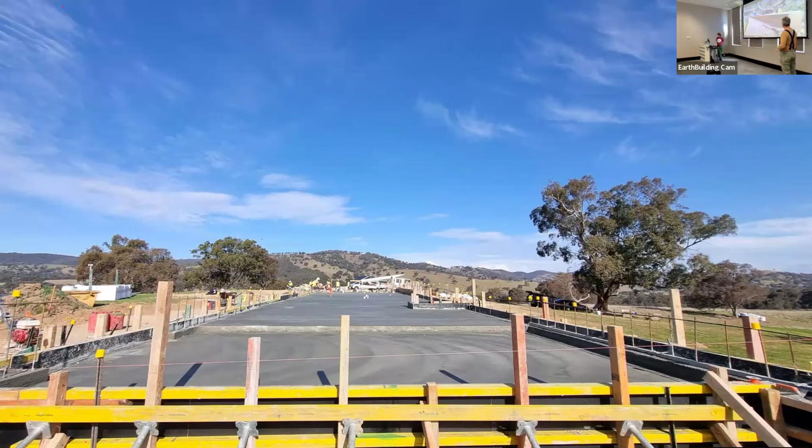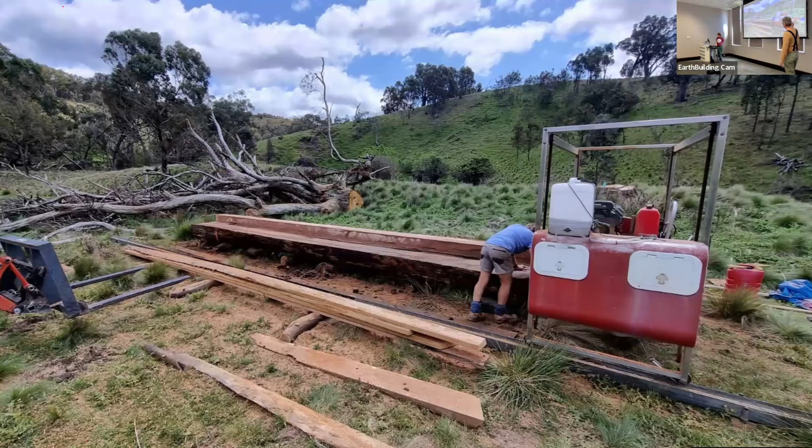So we put a waffle pod slab down, and then they felled the tree - I can't remember what species, probably some experts here would know - but a big old eucalypt they had on a neighbour's property. They got a mobile mill in and milled it all up and took it all off on a truck. Anyway, that's on the way to another story.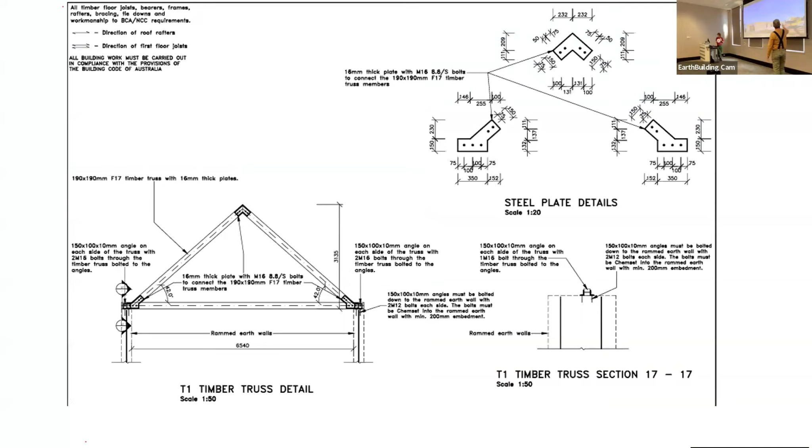That's what they built out of the timber - these big trusses with embedded nailing plates, and there's his details, there's his details. Anyway, that was his detail. And they got the crane on the site.

They built all the things, and up we go. Yeah, and so then they're just dropping all the trusses on top. It's really simple - you build the platform, you build the two blades, and you just sit the trusses on top. And I don't know.

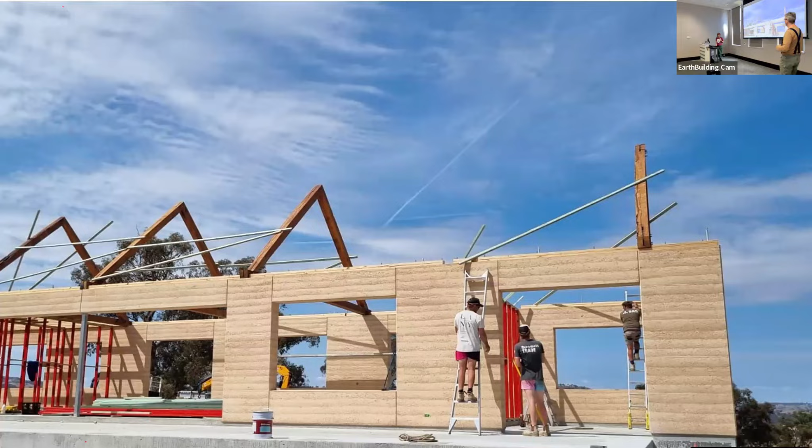I just like the simplicity of it. And keep going. Where are we? Yeah, that's blah blah blah. Nice pretty pictures. No, this is Bathurst. And then this is this structure. This is the solution to this beam kind of bulging out.

Where we had a pergola out there, and you can see that we don't have eaves, and we've got a black roof. But hey, you know, that's the sort of thing that happens. And then we've got this pergola structure which we use to buttress the worrying beam. There it is. There. It's hot.

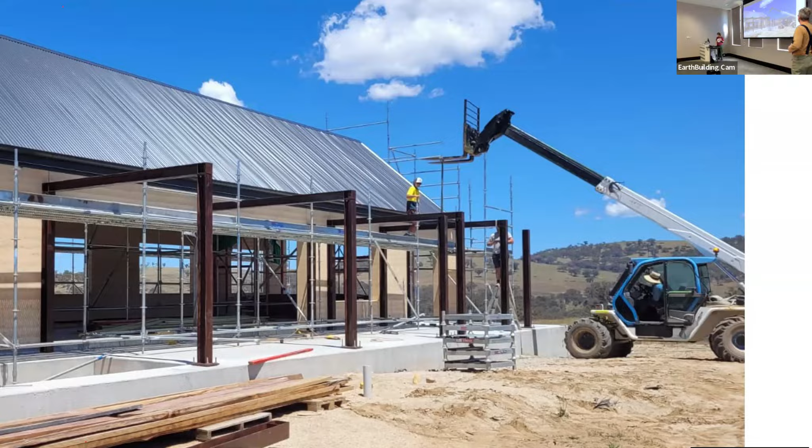Just a question. When the place burnt down, did they put the steel in as fire prevention? Like no. The steel rebuilt it in a way that, one would hope, if fire comes again, it won't get burnt down. Yeah. So the fire was an internal house fire. Oh, it wasn't a bushfire. Oh, wow. It was the hempcrete. The hempcrete caught fire. Makes a difference. We keep going.

It was a fireplace onto the back of hempcrete, and the temperature, he had it cranked up, and it sucked into the fibres. This is the analysis afterwards. It sucked through the fibres, and because there was a stud wall outside, it was fanned by a lot of wind. It was quite a windy night, and the fire was sucked through and went up, and they didn't notice. They said the whole roof was glowing red. It just collapsed, the whole building went down, terrifying.

It's supposed to be fire resistant. Yeah, but it was a particular situation of hempcrete. There was a timber wall fanned outside and the fireplace on the hempcrete. Could you have experimented with solar to change the capacity? So I once had a project where I wanted to change 8 water heaters, and I changed them from electric to heat pump. So to make the basics work, we just used the solar.

Yeah, but the basics need to thermally tick the box first and then you work on the energy. So you can't go below the stars. You have to have the level of thermal performance before you go into the energy costs of balancing out your solar. You can't max out on solar and have poor performing walls. No, you've got to do that first.

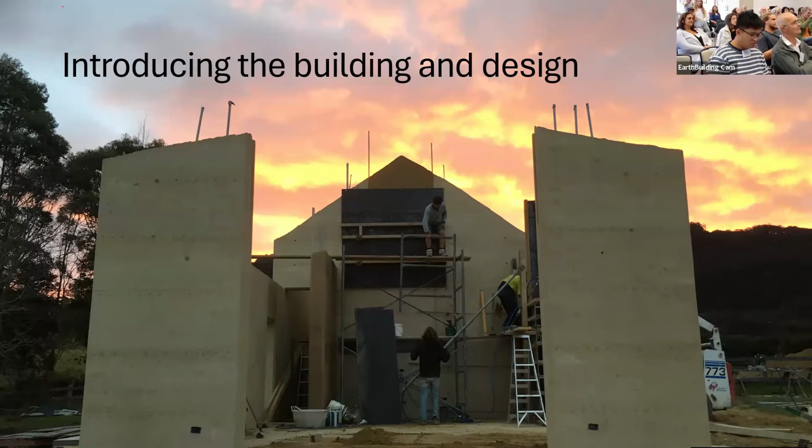So I instantly informed the client that winter was going to be the issue. Summer, spring, autumn would be fine. She could come down any time, and the house would be pretty comfortable. In winter there's going to be a shortfall. That's all the buildings I've ever built in the Shoalhaven. That's a problem. It's a winter problem.

So I suggested to her that we wanted to have an open building. She's a country sort of person. It's a magnificent site, good ability to orientate in any direction. But north was fantastic, and easterly views and all views were brilliant.

I wasn't going to resolve the problem of arriving to beautiful comfort by having a mobile app and pressing a button and starting up the air conditioner. It was always going to be a passive low energy building. It's outdoors looking to the east and the north a bit, but there's an ocean view. It's quite lovely.

So I'm going to jump through this, but she was happy to have a wood heater, and I said, look, if you have a wood heater in here, it'll warm it up nicely. But the thing is, you arrive on Friday, it's going to be a cold house. It'll be lovely by Sunday afternoon when you're leaving, and then the house by itself is going to be beautiful halfway through the week until Wednesday, and then it'll start cooling down. Back Friday, it'll be cold.

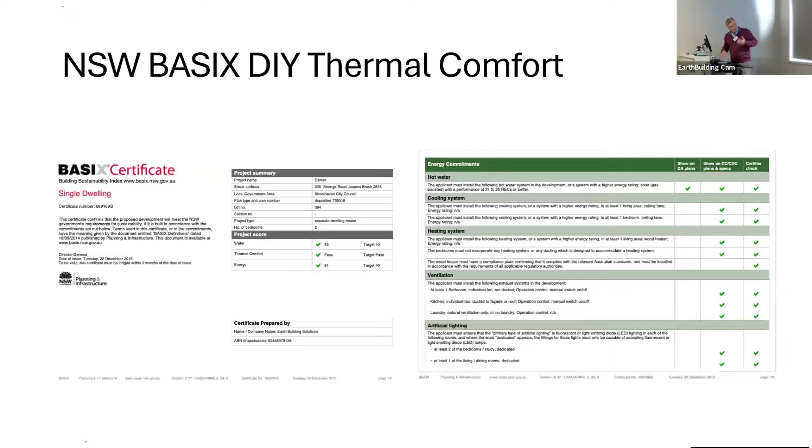And unfortunately, I didn't get a certificate on it because the photovoltaics weren't put on straight away and the heat pump wasn't put on straight away. And so we never got the final assessment done on it. It'd be interesting. I think it would have been up a bit on my place because of the double glazing and things that went into it. But that's just a few views of the building.

But Faye, when we were doing the life cycle assessment, she was good to work with because she was talking about how when you put in double glazing, your embodied energy goes up, your operational energy comes down. But she was saying there's going to be a balance in the full life cycle assessment of the building. You don't want to build up the embodied energy, which is an instant carbon bomb right now, and then over the life of the building, the operational energy is saving you a little bit. So you've got to look at both. Unfortunately, we're looking at one thing at a time in Australia.

So anyway, it's achieved a simple barn-like look, and it's quite nice. That's a southern view. That's inside. So what I like to do with earth buildings is sail them. It's how you operate them. They're naturally ventilated. My house and Ray's house and a lot of other houses are ventilated all the time. Not when we want to conserve energy. They're ventilated all the time.

And conservation is a different thing with earth buildings. You've got that ability to naturally condition it. So the thermal mass is able to moderate air changes, and it's actually how they operate. So I think in NatHERS, with set ventilation logic and things like that, it doesn't really reflect how you operate the house. So you don't get a real accurate prediction of how they work in reality.

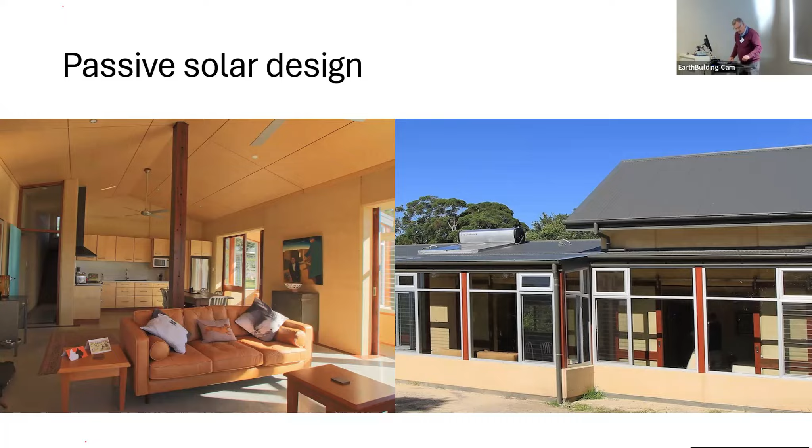So it all works on sun angles and everything pretty correct. You can see there that the winter sun's coming. The conservatory pops out in the middle, but most of it's that narrow conservatory. So the sun will come right into the floor of that living area. The sun angle in summer is cut off pretty well, though there's not much of an eave there.

But in summer, the conservatory is a veranda, so it's completely open. All the hopper windows at the top, the louvres, everything's open. So it's just a free flushing veranda in effect. It's all louvres, so it's open 100%. It's still there, but it's all open, so the air's just running through it. And you can close or open those windows behind, depending on what you want.

If it's a lovely breeze, a nor'easter blowing, and it's quite pleasant, let that through the whole house. Open up the back windows and let it through. If there's a southerly blowing, you can run it the other way. So it's all about just sailing the house how you want it, really. So it's not about sealing the house. And it's got good cross-flow ventilation.

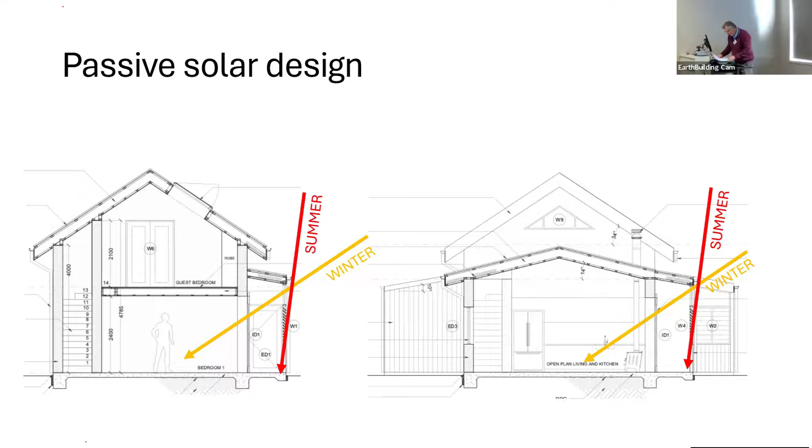So, compliance. So I had a problem with retrospectively complying with the OC. In BASIX, when I originally did it, I had put in timber window frames, and in the end we chose aluminium window frames. And I don't know whether I got in there and changed that particular side of it, but I had to sign off on BASIX. And I didn't want to just ignore the fact that I changed the windows.

I possibly could have got away with it. But I thought I really need to show compliance with energy efficiency by modelling it in NatHERS. So we were looking for 5 stars because it was an older building, and we got 1.7 stars. So this was a bit of a concern and surprised me a lot. But when Phil Harris from Troppo says that a 0.5 star house is brilliant, and if you get 7 stars then it's a terrible house, it gave me a little bit of confidence that I was on the right track.

But I know the house is a very comfortable house, and the client is not one to put up with fools or discomfort. And she lived in it for 2 years without a problem. And I visited the house in winter; it was lovely. I visited in summer; it was lovely. So I know it is a good performing house. So what do we do? We've got a terrible star rating.

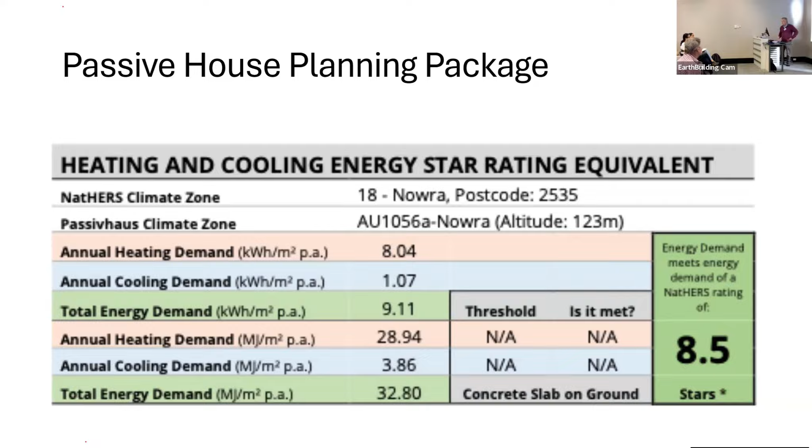But just going on to my place, I was moving on to my house. It's an old mud brick house, and it's 3.2 stars. I've had discussions with Tony Isaacs, who retrospectively modelled this as 3.2 stars, and then recently we've looked at it because it's an old building. It's got 1.5 state of the art sort of insulation in the roof. Single glazed, beautifully leaky windows. Probably I couldn't afford as many windows as I wanted on the north side, so he's optimised that.

We looked at it. I said, NatHERS doesn't believe in deciduous vines, and they're a problem for them, and trees and things like that. But we looked at it again. I said, look, 7 Stars is coming along. How are we going to cope with this? Say I wanted to build my house again. What do I need to know?

And so we upgraded the roof insulation to what's standard now. So maybe R5 batts or R4 batts, which I always put more in than needed. And then Anticon 1.5, so you've got good insulation of the roof. I don't think you need to go to double glazing, but I'd consider double glazing if I had to. And just a little bit more glass from the north. And we're gradually getting it up without turning it into a brick veneer or reverse brick veneer mud brick or anything like that, which I don't like.

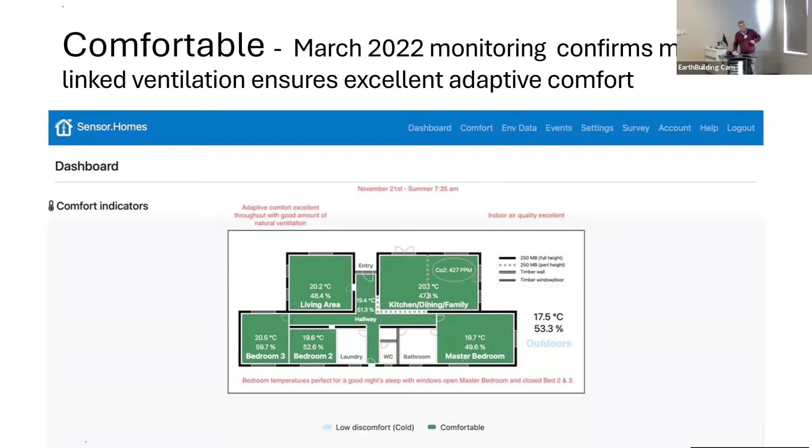But I put in the exhaust fan to resolve that. It's never been a problem since, even with the crowd - lots of red wine and laughter and happiness and talking. So that's resolved it. We're back to perfect indoor air quality all the time, no heat exchange needed.

So we've got to look at climate change resilience - it's a big thing, and passive survivability is a big thing too. I've never had... I'm like Ray. My house peaks out at 28 degrees. The coolest place in the house is by the leaky fireplace chimney - if you get down near the hearth, it's even lower than 28. That's free running mode.

When Tony first did my house, I think the cooling logic is probably the reason why there's anything in that area from 28 to 30, even though it's negligible. I haven't really experienced that, but it's so little I'm not going to argue about it.

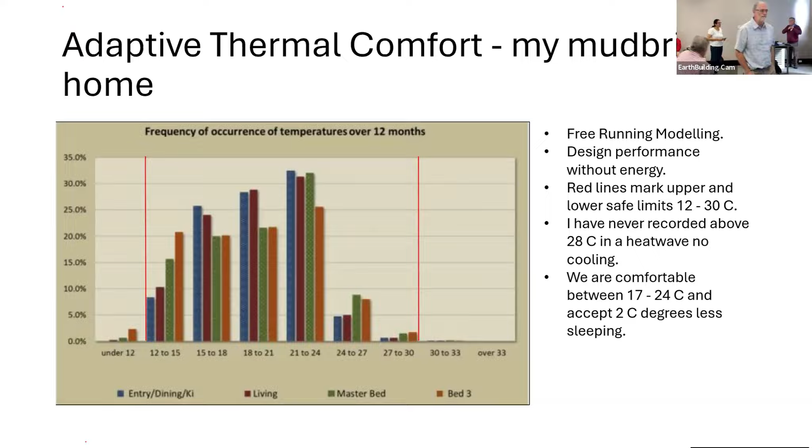I've got a question for Peter about that slide where you had different monitors in the room for temperature and humidity. Earth is always said to be really good for regulating indoor humidity. Have you got comparisons of the outside humidity versus what it is inside? You were doing humidity and temperature. Is it generally quite stable throughout the year? What's your average?

It's not always stable, because it's open, the humidity will eventually rise. In recent years, with more humid conditions and warmer nights, I'm considering installing ceiling fans. I don't have ceiling fans, I have one pedestal fan and that's adequate. But my plan for adapting to the future is probably ceiling fans would be the first thing.

So over this last summer, were you getting quite high humidity in the house? Well, no, it's not high humidity, it's moderated, everything's moderated. The thermal performance of walls in Australia isn't modeled well. Maybe an energy fielder like EnergyPlus or similar design software does that, but NatHERS doesn't. There are problems with NatHERS, if someone wants to ask me about that.